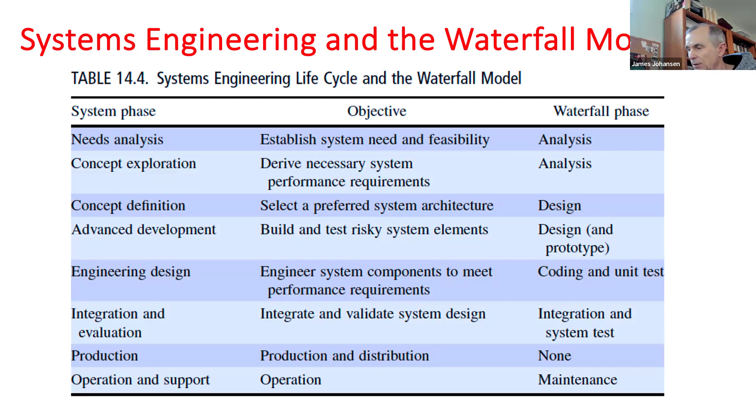So for systems engineering in the waterfall model, this gives us some details you can reflect back on this chart and look at some of the objectives taking place for each one of those phases. You can feel free to review this a little bit later, but I'm not going to go into this in any more detail at this point.

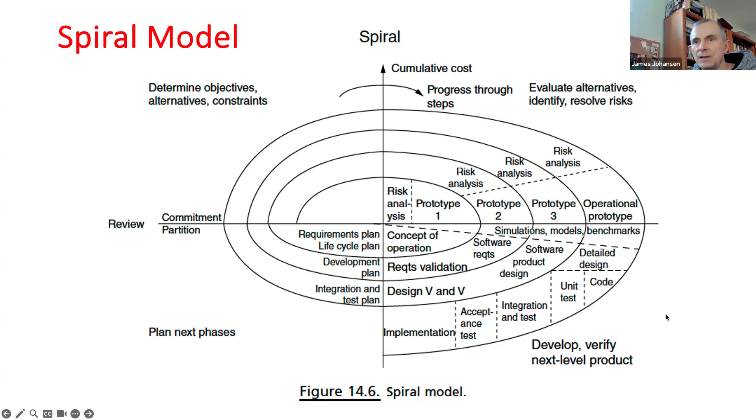Here is a spiral development, and so we can see for this case, we've seen a spiral before, but from a software sense, we're seeing that we're spiraling out. And so the software is getting more and more complicated, more and more robust, more and more complete. And so here we're just seeing these different quadrants that we go through as we do this spiral development. So maybe indicative of thinking of what we are talking about for agile development.

So does that spiral, that agile approach, that concurrent work, and finally you get to a point where it is accepted, and then you're able to integrate that, and then you can be going to the next increment of what you're doing.

Okay, I have a couple of charts. This is going to be the first one, then I'll have some graphics, and I'll come back to the second part. So for the software concept development, we have the analysis and design. So the performance requirements for software embedded systems are developed at the system level and should be verified by software developers.

Performance requirements for software-intensive systems should be established with close interaction with customers and users, and need to be verified by rapid prototyping. So we've talked about involving the stakeholders and customers before, where that's also true for software. They should not unreasonably stress software extensibility, and so that's something that you're going to be looking for.

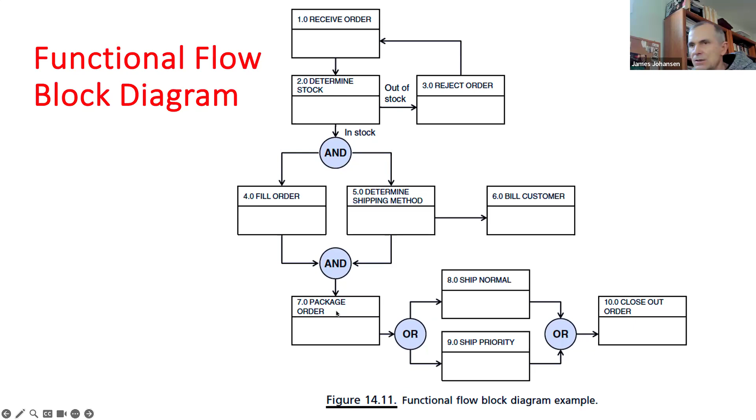And here we can have that functional flow where we can have decisions or the possibilities of how we're going to be doing things. Both of these have to be true, or one or the other has to be true. You can have normal shipment or priority shipment, as we're seeing there, or things where you have to be doing both for them to take place. And so those are also some things that can be part of the software development process.

So this is the second chart. We showed the first one a few minutes ago. So this is software concept development, analysis, and design, the second part. Two prevailing methodologies for designing systems are structured analysis and design and object-oriented analysis and design.

So have all of you had experience with doing some object-oriented programming? Maybe you can just do a thumbs up if that's something that you're familiar with. Using Java is an example of something that does that. There are other languages, something that's dated now, but just historically doing something in Fortran, instead of doing something you might do with Java or C++, that might give you an example.

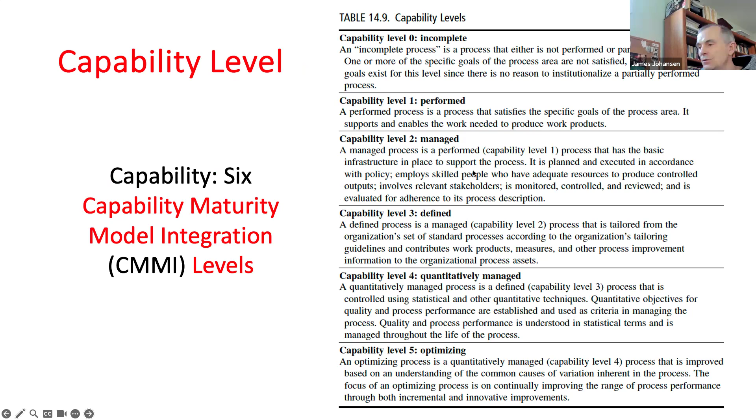There's something called a capability maturity model integration, CMMI, and it establishes 6 levels of capability and 5 levels of maturity for an organization. The CMMI establishes KPAs for each level and provides a basis for assessing an organization's overall system and software engineering capability. Okay, so this is just a listing of the 6 capability levels. And I apologize, there's a typo here. This should be saying 5, but I'm not going to go out of full screen mode at the moment. I'll do it in just a second. These are the 5 maturity levels that are associated with that.

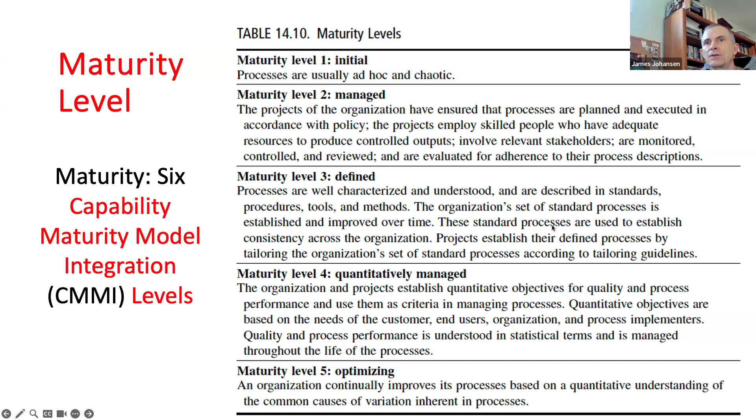So that's a quick run through of software engineering. Like I said, I have a whole course that's dedicated to that, both introducing the concepts as well as giving an example of working through a software development project. So we've dealt with coping with complexity and abstraction, the nature of software development lifecycle models, software concept development, the analysis and design, software engineering development, the coding and unit testing, the software integration and test, and finally the software engineering management.

So let me pause and see if there are any comments or questions on that. Just give me a thumbs up if this is making sense to you.

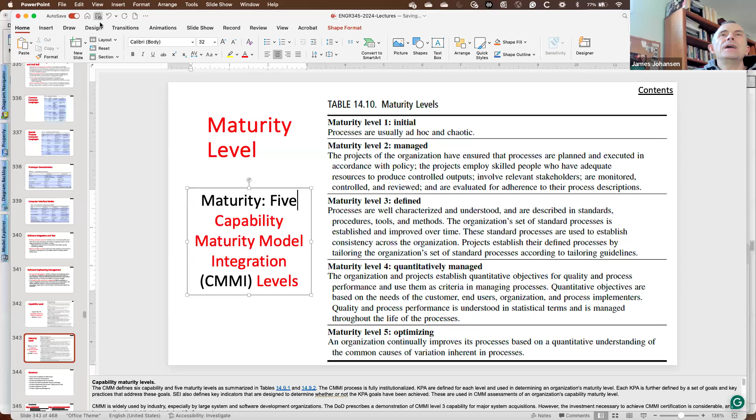Okay, well, with that, I'm going to switch over to talking about our project work. And so I gave a little bit of an introduction on Tuesday to give you a perspective about sequence diagrams. And I was showing you this relatively simple one.

And I'm going to show you this, and I'm going to go over to Visual Paradigm Modeler and show you a sequence of, with that one, I can actually have it execute, and it will walk through these numbers here. And so you see that these numbers are related to one another. And so if you were to start to make these swim lanes and start to populate them, have a connection from one to the other, you're going to see it's going to create a 1.

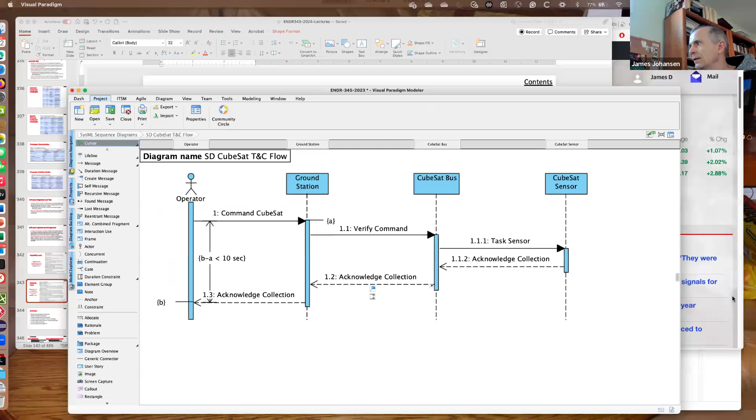And so if you're still in this bar and you go to another swim lane, it's going to have a 1.1. Go to another swim lane, it's going to be 1.1.1. And then we have things in the reverse. It starts to go up like that. So you can have it so it does it at those levels.

But let me show you what things look like in Visual Paradigm Modeler. And so actually, I'm not going to be showing this extra window. I'm just going to have it over here. I'm trying to make a full screen. Like with the activity diagrams that I showed you, like with the state machine diagrams, these are executable. And we can see that here we have some numbering schemes. And so we could just keep it all at the top level. So here we just have 1 through 9.

And so this is trying to show the mission events for a launch, the spacecraft separation, the solar array deployment, the antenna deployment, and then it's ready to go operation. And so we can see some things here, like trying to give us an idea that there is a minimum and maximum time that's supposed to go between the spacecraft separation complete and when the solar panels are deployed. You don't want to have the batteries lose their charge before we actually get them so that they're being replenished by the solar panels.

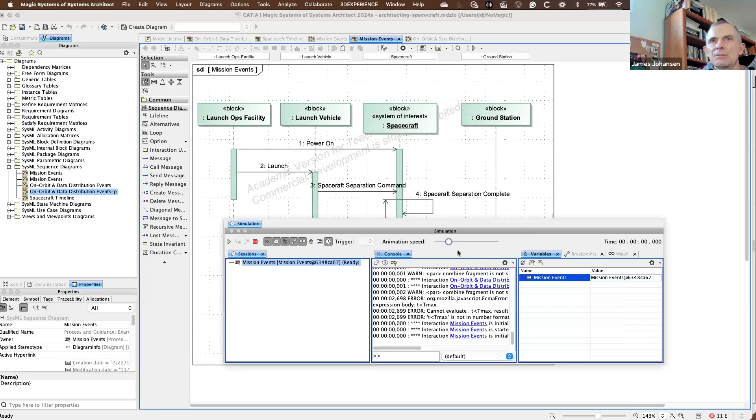So I'm just going to push this execute button here. And then what it does is it charges up this thing over here that I'm going to be showing on the side. I've also slowed down the animation speed, and we can just see how this works from one module to another. So we start with the power on. So the launch, the separation. I'm going to actually show this again in a minute, but have it a little bit slower still.

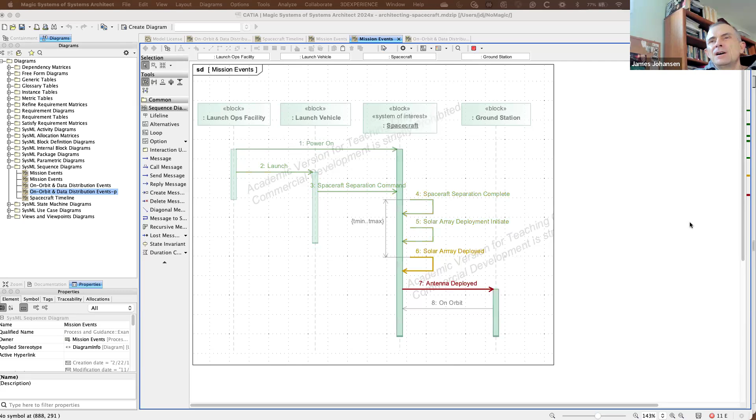So when you launch a satellite, you want it to be powered on. So it's going to be able to have this handoff and be able to readily do what it needs to be doing. So what this is trying to do is showing a sequence of passing of information, of having one thing being completed and another. A difference that we can see from this as compared to an activity diagram.

Activity diagram was we can have things that are indicating a decision. So it's either true or false. And so we branch to one or the other. That's not something that we see here. We're just showing this exchange of information. Mostly the way this is shown here, it's showing information that's going from left to right. But there is one example here that's going from right to left.

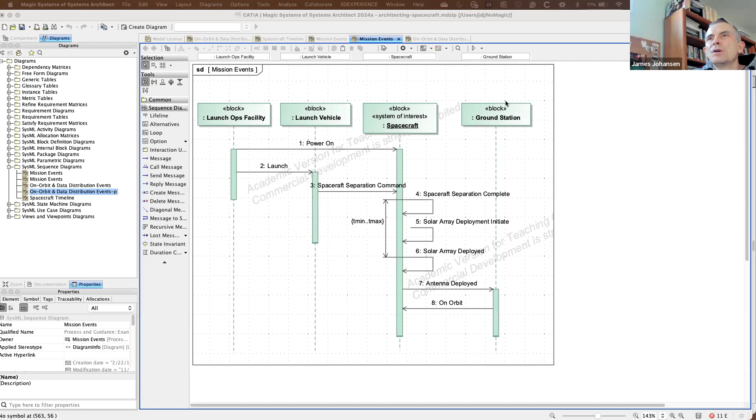And so it's now on orbit. The spacecraft is ready to be operational. We can see that it's gone to that point. So let me pause and see if there's any comments or questions on what I've shown here.

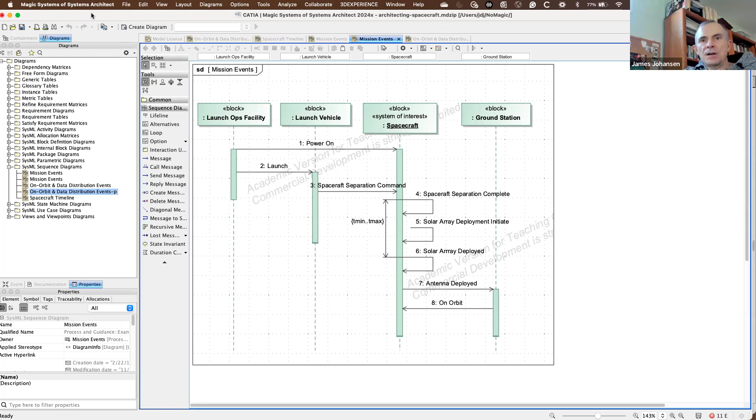Okay, Abby, I saw your question. This is one of the reasons why I actually am using Cameo, because there isn't a way to do this executability with either the community edition or the modeler, which is the version that I have. To have it be executable, you'd actually have to upgrade to, well, I'm not gonna go to that mode right now. It's something that would be closer to what is required for the Cameo Systems Modeler, that capability.

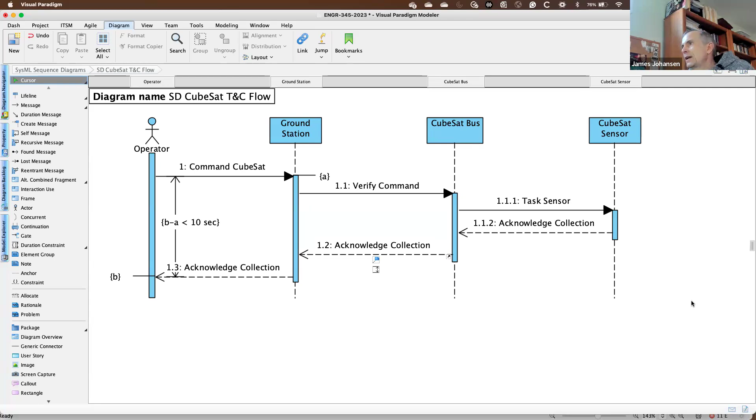So that's unfortunate. I know it is really a nice thing, and I'm trying to give you a sense that that is a capability that is going to give you that next level of trying to troubleshoot what you're trying to do with your system. So sorry about that. I wish it was available, but unfortunately that's going to be a shortcoming for that. Any other comments or questions that people have? Okay.

There are several that I have from a former student that I include, and we have some level of complexity that you can have. And so maybe what I'll do after this is we can try and just do one on our own. But just to give you a little bit of a sense here, so we can see this general flow. It's going down; this is trying to show a control sequence, the passing of information from one to another, and then have it go back to the control,

ground control. And so you might see some overlap to what we did in an activity diagram, which is okay. There is a little bit of overlap, but like I said, each one of these has a slightly different purpose, and so we want to be thinking about that. You can change some of these icons here. We've seen some examples of this.

So this is a control. So if I go to the specification, this is shown to be a control. The default is when you don't change that stereotype at all. I'm going to try. I haven't tried this, so let me see if I change this to control. What happens if it gives me otherwise?

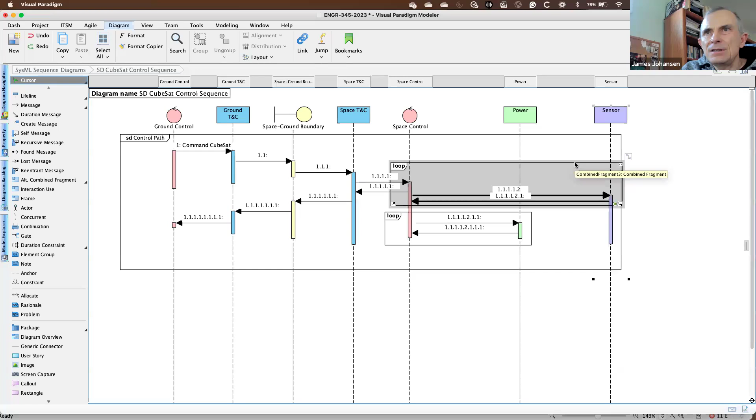Yeah. So it has a slightly different icon for the different things, and so the stereotype is giving you a more specific way of considering what this swim lane, what this is actually doing. I'm sorry, this lifeline is doing. And then we can have this way of trying to combined fragments into maybe a term that we'll see in different areas of a package, if you will, or just we're trying to show that this is something that can iterate back and forth. So that's something that can be possible.

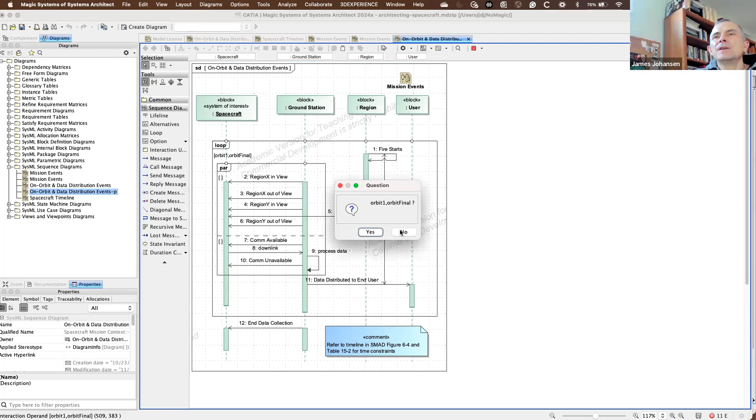So it can be challenging to pick up someone else's code and to make sense of that. So when I was trying to do some execution of these in the Cameo Systems Modeler, when it has these packages, it really doesn't quite work as well. And so I'm not exactly sure. There may be some issue with this. It just goes through this and it doesn't go within the inners of these packages. And so here we have a package within a package. But

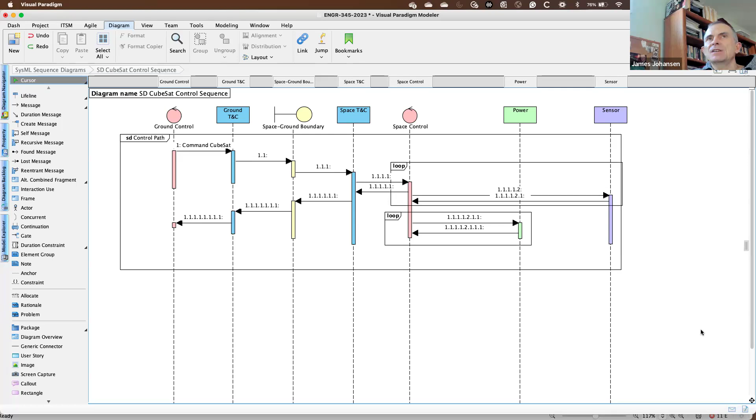so this is a combined fragment. So that's what it's called in Cameo Systems Modeler, and here it's just called a combined fragment. It's called the same thing, so that's good. This isn't necessary, say, if you're just trying to get something basic. And so maybe I'll just pull up another one. This is a little bit more straightforward. And so Kyle, this is dealing with a power scenario. And so maybe something like this might be easier for you to get your arms around to start out with.

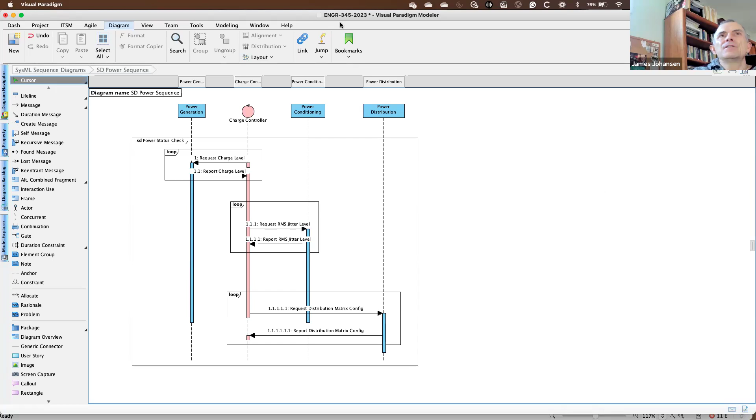Okay, let me go ahead and try and create a new one. And so if you guys haven't already started to play with this, maybe this will be helpful. So I'm just going to do a blank one. And like I said on Tuesday, I'd recommend that you do this real time. So some of these diagrams, this is another shortcoming of Visual Paradigm. You can see how it doesn't show you the SD that's in front.

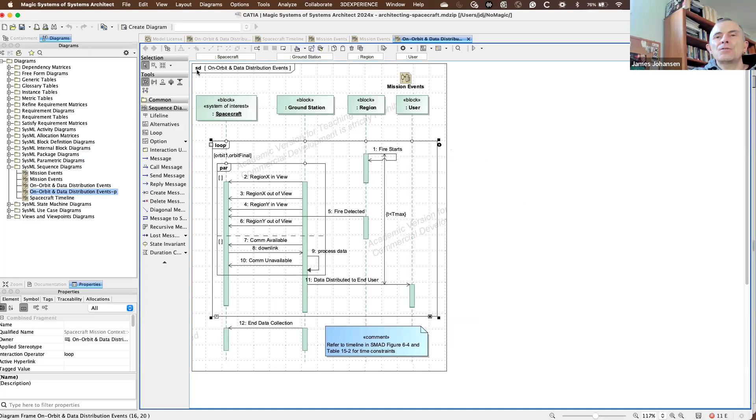If you go look at Cameo, all of them are done according to the specification. And so this is one of the reasons why I typically just start my diagram names with whichever one of the 9 SysML diagram types it is, to try and make up for that shortcoming, to make sure I know what it is. I'm going to keep on the satellite theme. So I'm just going to call this a satellite control sequence.

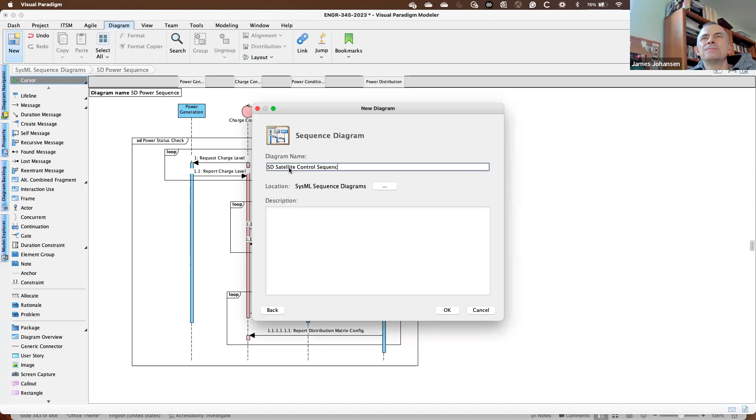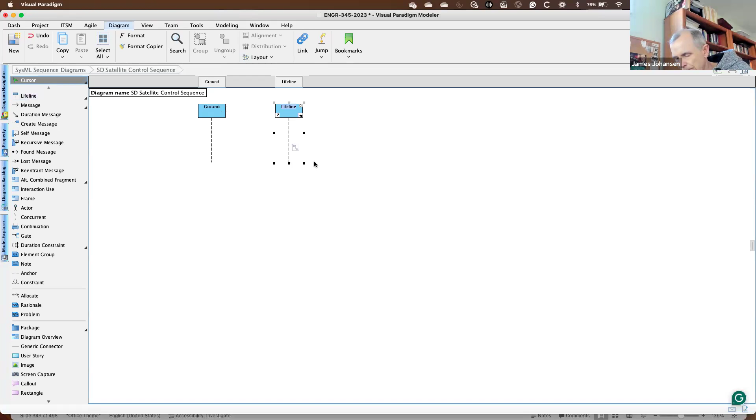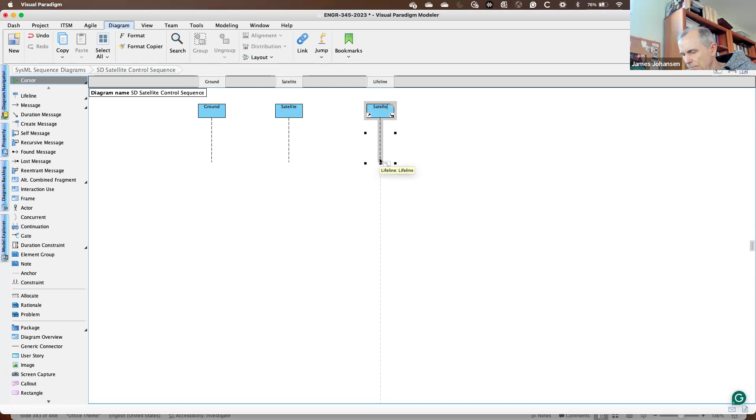Start with that. So do a lifeline. Call it ground. Do another lifeline. Call it satellite. Do another one and call it the satellite computer. And then finally one more, call it the sensor.

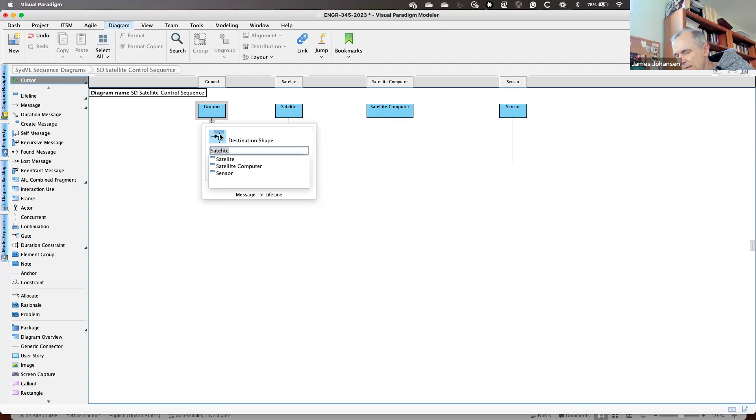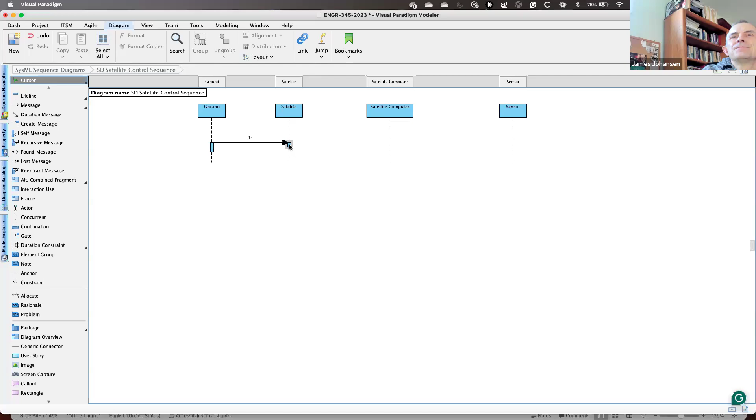So I want to have a connection between this. So a message to another lifeline. So I'm going to do that. I'm going to click on the satellite. So it created that line. It created a little bar here. I could annotate this with a name if I wanted to. I'm just going to leave that blank. And so if I want to have it connected to the same little block here, do that to the next one. So like computer.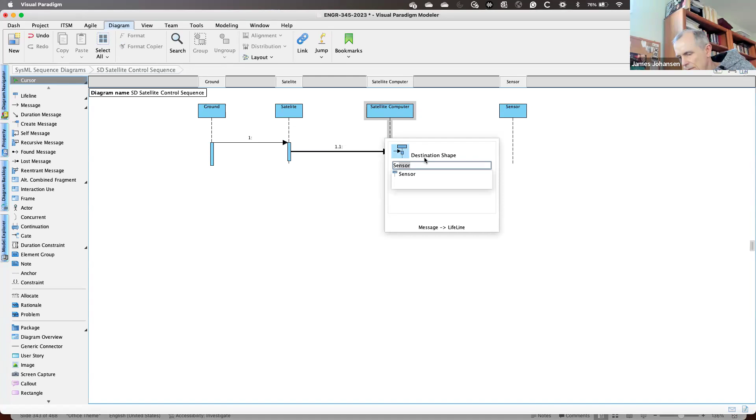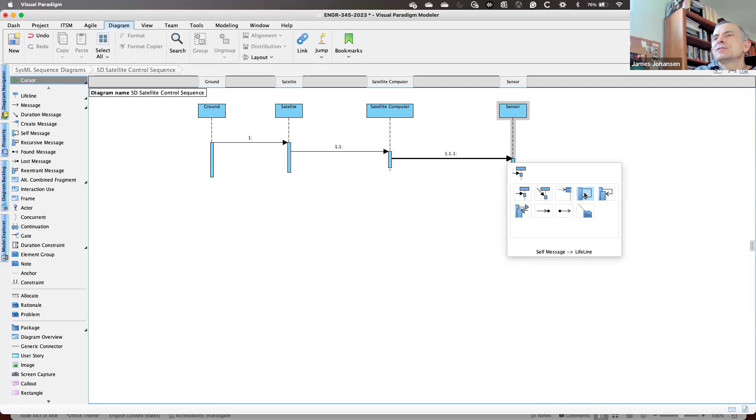And then, okay, so what does this mean? That's one of the things that I can be thinking about. Okay, so they say this is how I'm trying to command my sensor. And so there has to be this continuity of the sequence that goes from one to another. And then, if I wanted to create a response, well, let's say I'll do this one first. And so I'll say something like do measurement, and you can make these a little longer.

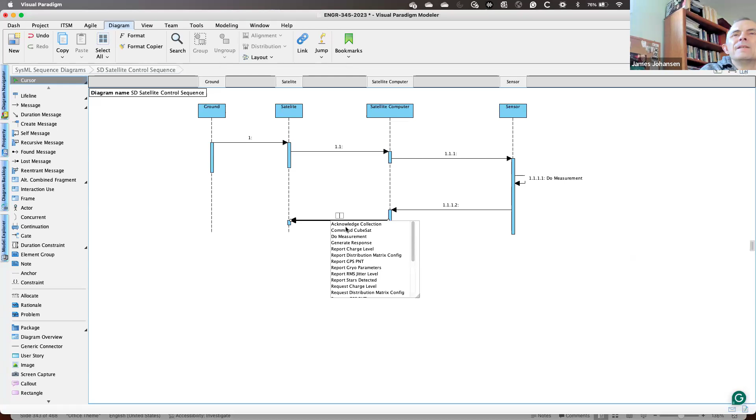Go back to the satellite computer. Back to the satellite. And back to the ground.

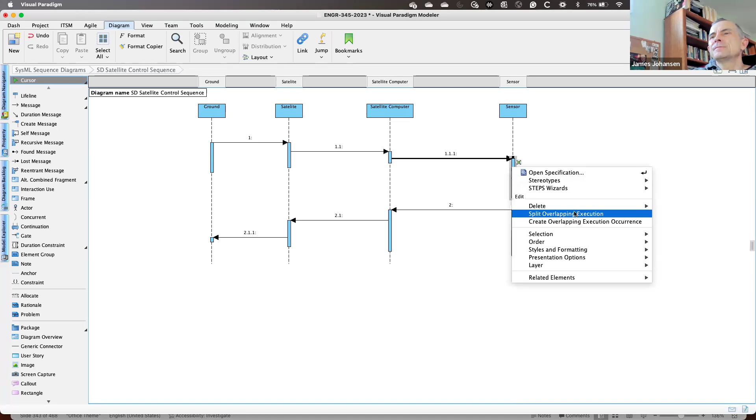So that just gives you a rough idea of what it can look like here. Let's see if I... so what I did, maybe it's a little bit easier to divide these up to help us. So you can actually make these into individual things here. Let's change the naming convention, the numbering convention here. So I have the setting of the command, an operation, and so I could also...

Well, let's just work with this basics. Are you guys following what I did there? Does that make sense? Why don't you give me a thumbs up if you're following along with what I did there?

How'd you do the change number thing? Can you show that again? How did I change numbers? What I did is I broke these things up and it has a numbering convention that it does on its own.

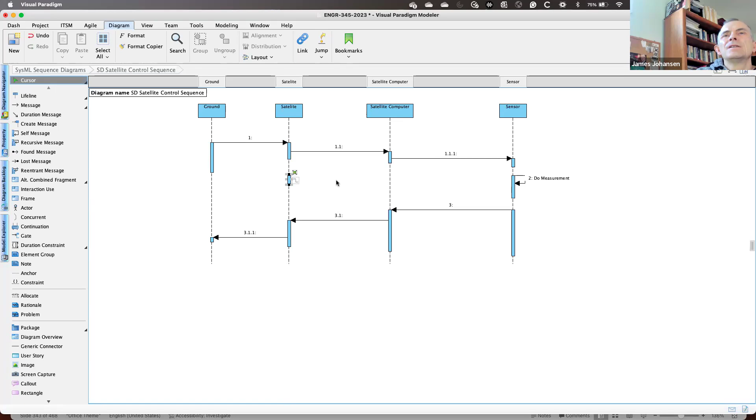So, like, I could split these up. Yeah, that's not what I want. So let me do another thing that I'm going to do. So maybe I'll try and...

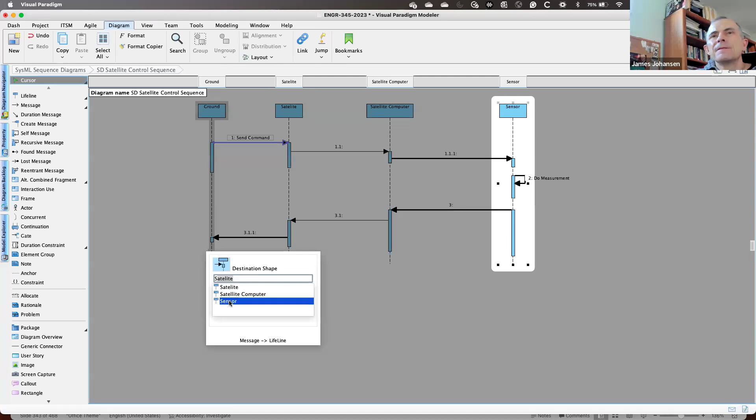Hey, I'm gonna split this up here. So this is what... Nathaniel, this might be helpful. So you can see how this is related to this item here. If I split this, it changes that numbering, and so this is not related to this. I'm going to try and do something different here.

You can actually shrink these if you want. So, okay, that's what I want. And so...

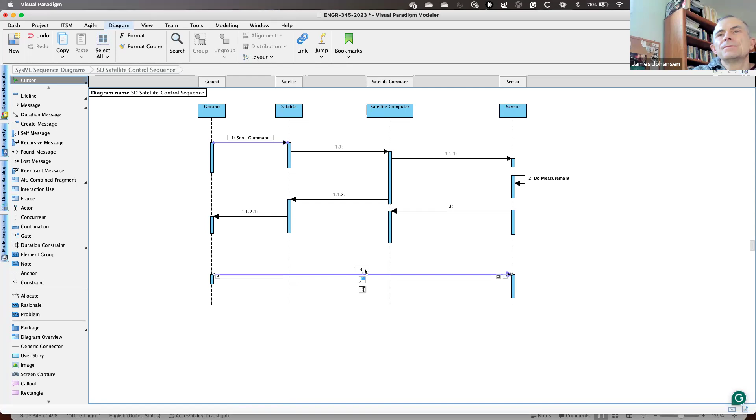A lot of times what happens with large satellites, like the James Webb Space Telescope, is they would have a telemetry and command, a low data rate where you can get some basic things, and then they have a high data rate associated with the actual payload itself. So this would be like another path in which you can be doing that commanding. This is an example of what I'm trying to show here.

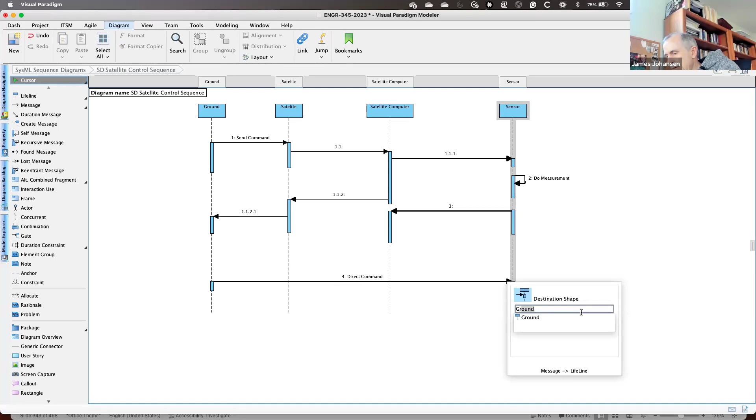And so that would be another possible way of having something that you're trying to annotate. And then we can have a response that's going back from the ground directly to the sensor. All right, well, let me pause, and what I'm going to do is stop sharing my screen. I have... and one more question too.

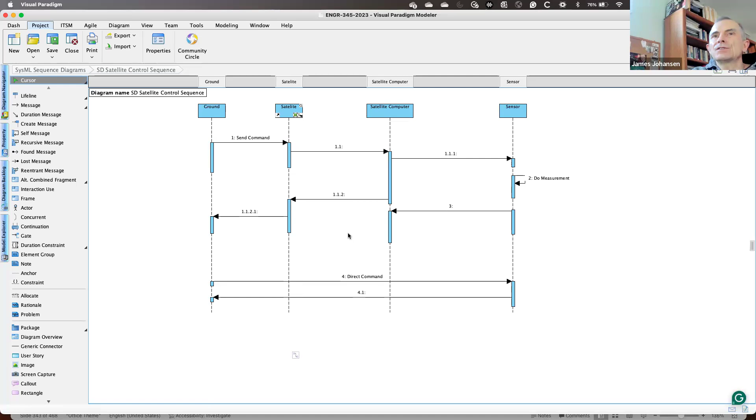When you read this diagram, is time just moving from top to bottom? So basically, each one of these is a sequence flow of information. And so this is like one example of an exchange of information, and below here we see another example of what's being laid out. So yeah, you could say from top to bottom, anything that needs to connect with something else has to be annotated with these connections that I'm trying to show you. Does that make sense?

Yeah, thank you, that clears it up.

All right, well, you guys have some feedback for me. How do you think this might be useful for your project? Or if you want to be sharing your visual paradigms, we can also do a little back and forth with that, spend a few minutes here to do that now. Any of you want to share what you have, or want to at least have a conversation about what you'd like to share, what you'd like to do?

I can share, but it's on my phone, so I don't know how I can share that. Yeah, if you just go to Zoom, and on the bottom there's a green button with an up arrow. Oh yeah, but you can share because... I have Visual Paradigm on my laptop, but I have Zoom on my phone. But I think I can change the camera to show it.

Well, okay, yeah, that gives me an idea of what you have there. It's a little hard for me to read, but I can see the general nature of what you have with your diagram, and I think what you're doing is great.

And so you can see, what I did is I created one sequence, and then I actually put in another one. As you start to think about what you're trying to do, this can be like a scratch pad, if you will, to be annotating some of the things you find important when you're trying to figure out the system perspective of your design, what you're trying to accomplish. But Abby, I think it looks good. Okay, and it's specifically for communication.

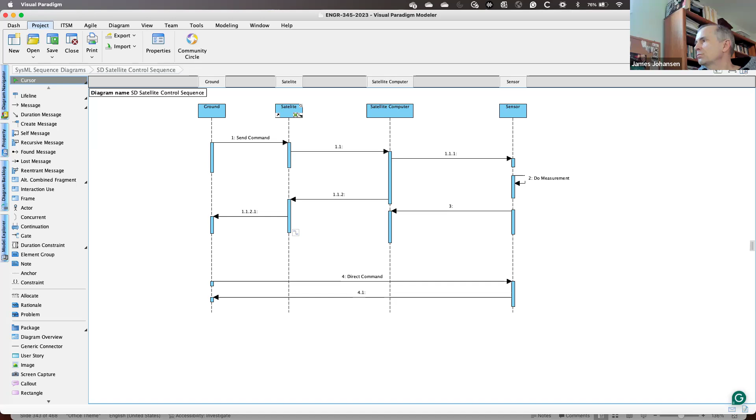While you're all thinking about that for a minute, I'll just show this briefly. What I'm showing here is another project, a paper I just got approved for publication. This is how a bacteria actually does its sensing, and then passes that sense detection to different parts of the bacteria. They have receptors called chemoreceptors.

So this is what starts to happen. It passes on that information, and based on the concentration that it's in, it either starts to enhance or detract from its sensitivity.

Just like you can think of your eyes, if it's really bright, your eyes get more accustomed to that bright light. And if you were to go from a light to a dark room, you'd notice it takes your eyes a while to adapt. Your hearing does something similar, to get used to loud or very low levels of noise.

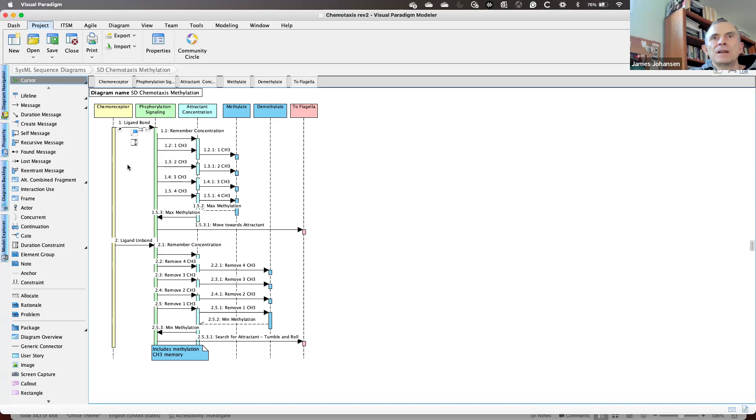Well, this is just another type of sensor that we can see with a bacteria, and it has this general flow. They're not using electrons to pass information, but there is a passing of signaling information, and then a response to that signaling information that actually takes place.

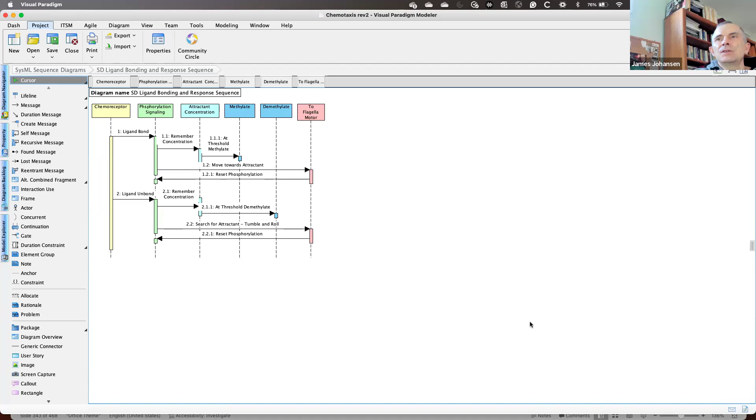So these are just several things I was annotating, showing here in a couple different manners, maybe just to give you yet another example of what this could look like. But in general, it's meant to be some kind of information, or something physically, that's being passed in one form or another.

Any other comments or questions?

Do we need to specify what type of information is being passed, or just say that? That's going to be -- remember, with each submittal you're also having a little narrative of what's going on in that diagram. So you want to have some things that give you tips just by looking at the diagram itself, but you can also annotate that further with the text write-up you'll be doing along with it.

Okay. Okay, thank you.

Any other comments or questions? Kyle, does that make sense? Were you able to follow along with what we were talking about there? Yeah. I hope you were having Visual Paradigm open and giving it a go, because I think it'll make it a lot easier and actually a lot more fun.